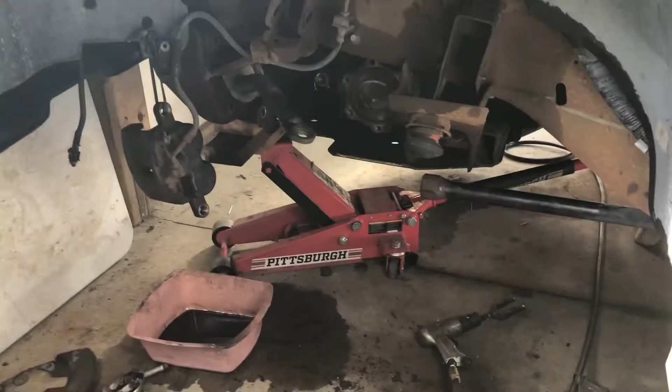So I'm working on my 2002 Suburban. It's getting a whole new front suspension and steering box. Anyway, that's not important right now. I'm putting these cheap eBay stereos in it because the old stereo and amp are shot.

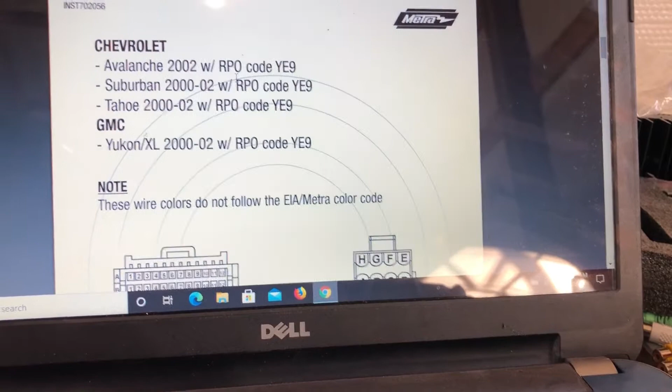Now the problem with this thing is that it's a YE9, which means it's not a Bose system, but it does have an amp. So the amp is bad. We need to bypass it, and it has been a real struggle to figure out how.

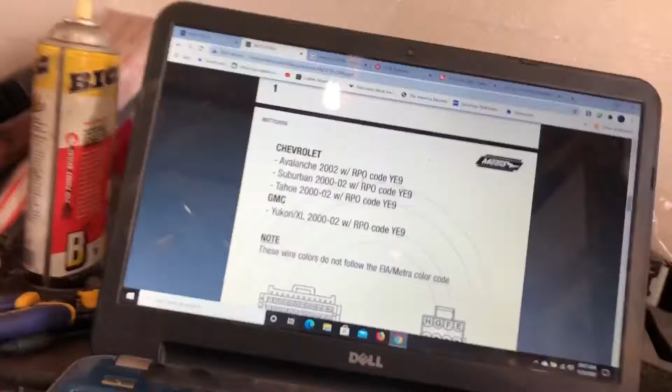Metra made a 70-2056, which was a perfect plug-and-play bypass harness. However, they don't make it anymore. You can't get it. But what you can get is the 70-2054, which is for the Bose style.

So the problem with that is none of the wires are the right color or they're in the right spot. But you go around here to the harness, which I installed. I should not have installed it yet if I wanted to do this video, but ignore that rat's nest.

By the way, it comes with, I think, like 50 foot of line each, some absurd number. You don't need it because you're just going from here to your original factory amp, which is right here. And you unplug its stock plugs and plug in this harness.

But before you do that, you need to pull apart this Metra plug and rewire it, because the sockets on the 2056 and 2054 are identical. So this socket here and this socket here - this socket runs the rear way back D-pillar speakers and sub.

I will not be using those. I'm not doing it today, but at some point I will be putting an aftermarket sub probably under the back bench. But anyway, so you take those and you bring up your Metra.

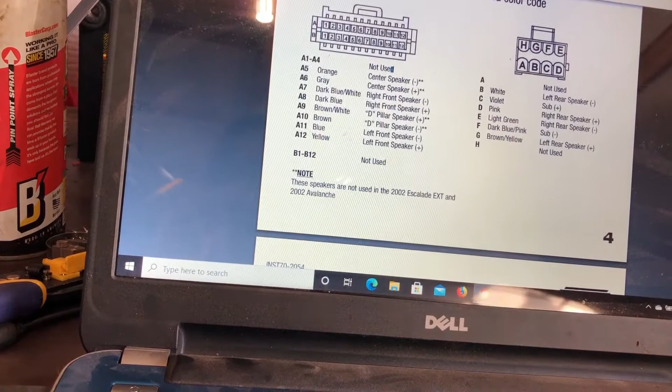You can get this off of their website - the install instructions for 2056 and 2054. And what you want to do is take the closest approximation of colors you can from Metra 2054 and reconfigure it, repin it for 2056.

You'll want to repin both sockets if you plan on using those D-pillars and subs. Like I said, I'm not going to be messing with those. All we're trying to do for right now, short term, is get the 4 door speakers running. So these are good instructions for that.

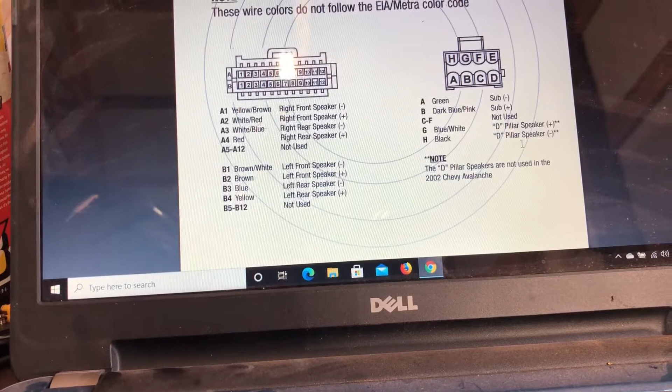Now, you will need an additional harness. That's not everything you need. You still need to power the amp and several accessories from a split-off harness under the dash, or I'm sorry, behind the receiver itself, behind the head unit.

And you can do that with the 70-1858. What you're going to do is you're only going to use your constant, accessory, body ground - basically the accessories that come off this plug. The speakers you're not going to use. You can snip them short if you want, you can leave them, but you're not going to use them.

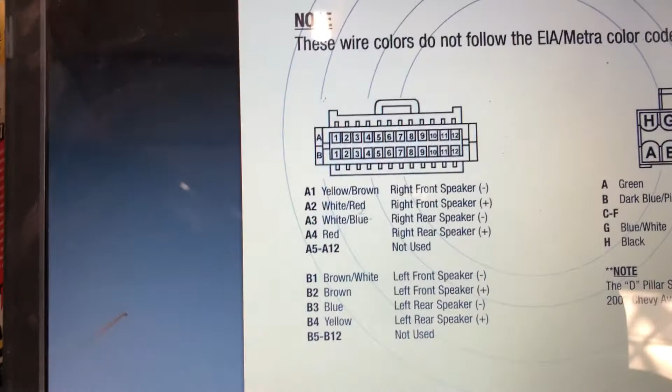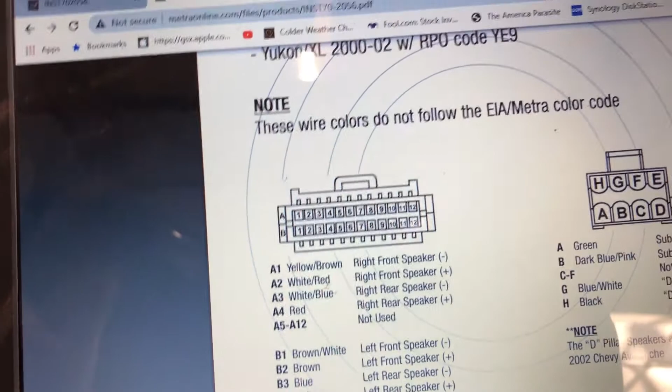What you're then going to do is on whatever harness comes with your aftermarket head unit, you're going to take and wire these, which will be different colors, so you will need to use - once you've plugged your 70-2054, sorry, once you've replugged it to make it like a 2056, you will want to use the 2056's instructions.

Note, it does not come with a yellow-brown wire. In place of yellow-brown, I used orange, so I just have to remember orange. So then you will want to take your aftermarket speaker set and wire it to these colored wires, remembering that that one will now most likely be orange or whichever one you use.

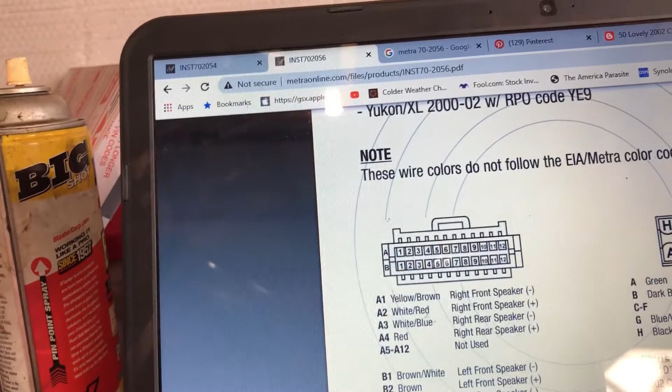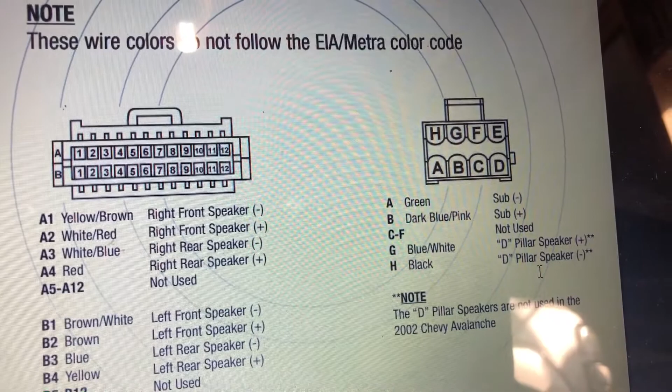You will have extra pins to peel off of 2054, so if you finish and have extra pins you don't need, you can just spool them off the harness and throw them off to the side. I imagine if you wanted to put in a small multi-channel amp to get those D-pillars and the sub working, you could do that.

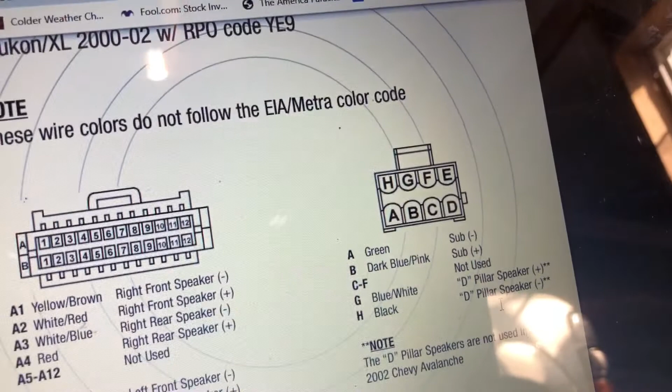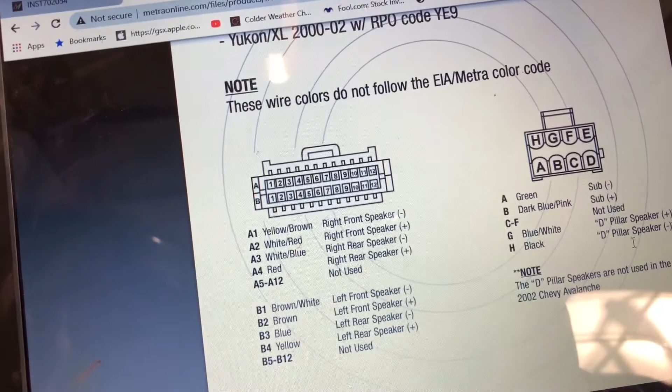I should have filmed more of the actual pinning and repinning, but on the Metra harnesses it's really easy. You snap a retaining clip off the back, and then I still have the retaining clip on the bench for the sub and D-pillar speakers. It just pops out - you can depress these with a pick, and on the other one you can pop them out by hand, then just rewire them how you need.

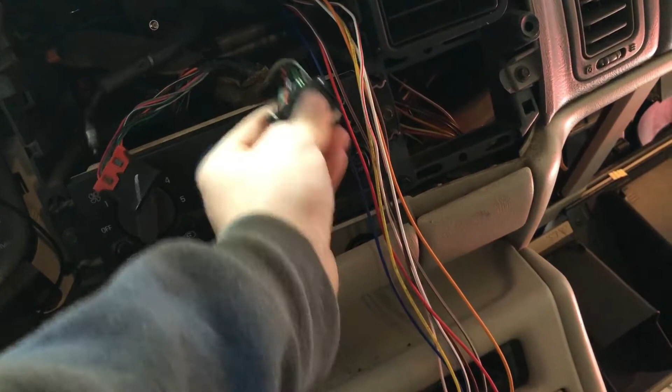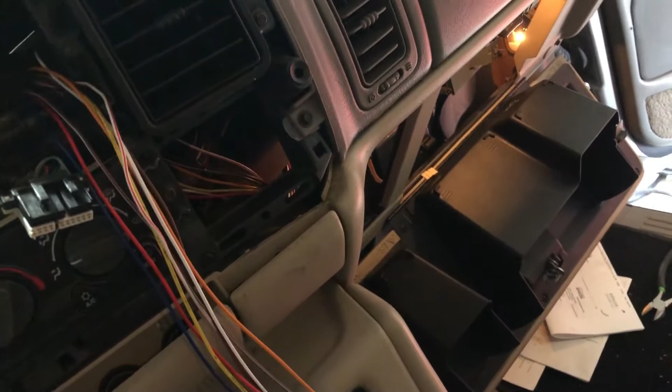I have this stock harness that we'll be retaining, and then I have my accessories that are going to be powered off that stock harness on this, which is the Metra 701858. So this will power the receiver and accessories and things like that.

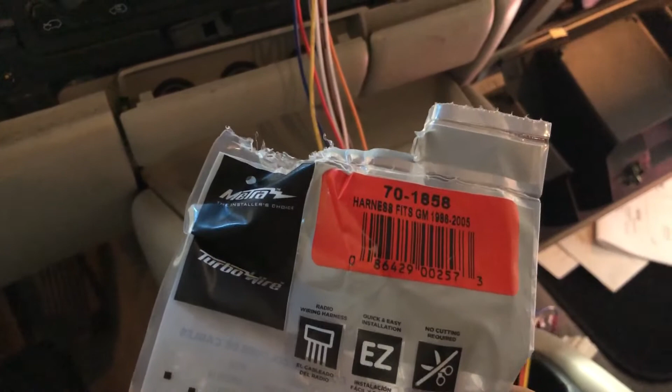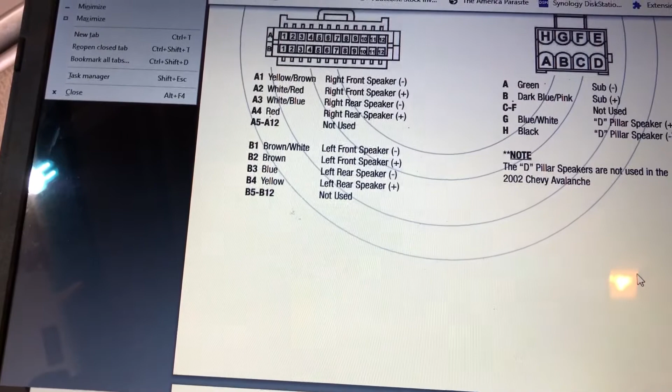So what's going to get confusing is that this socket harness adapter is not colored to standard color, so these won't correspond with your aftermarket. So what you'll have to do is decode. Just to remind myself what the aftermarket specific codes are, I'm using the back of the 1858 bag, and then I have my instructions for 702056, which tells me what colors to use. Remembering that there is no yellow-brown on the adapted harness I use, so in its place I just used orange.

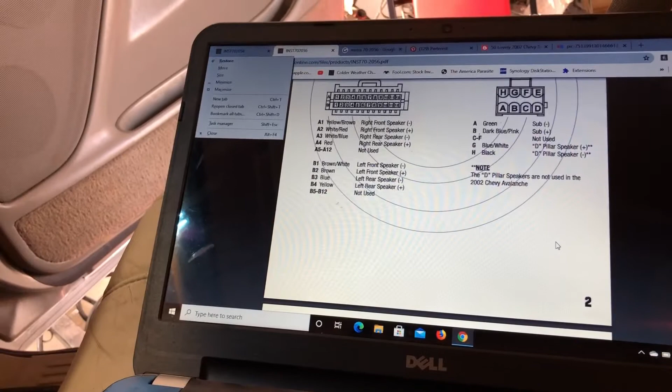So alrighty, this should work - we'll see, you'll never see this if it didn't. Alright, you're seeing me again, so it worked. Can't play the music or YouTube will get angry. So anyway, yeah, that's how you do it.